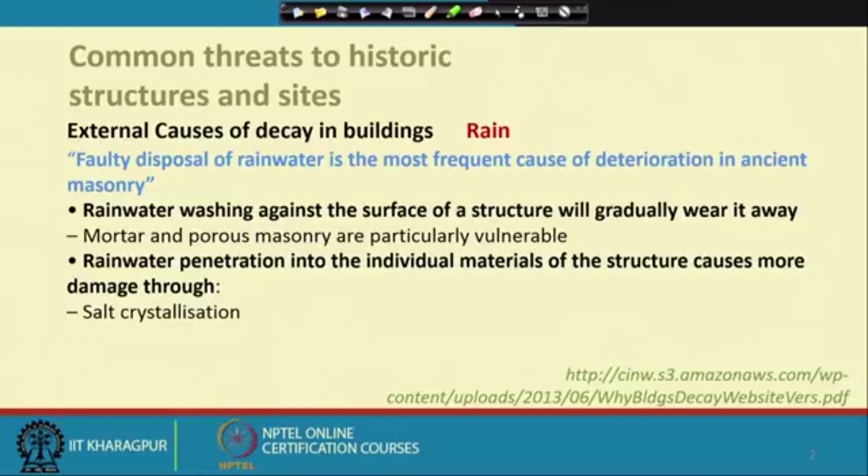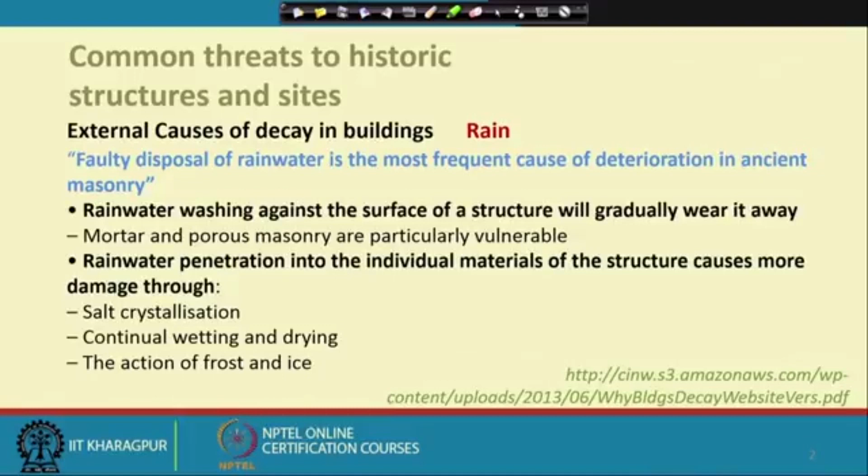We have been discussing the causes of decay of cultural property. In our last lecture we discussed the problems due to gravity, sunlight and other issues, and we started with rain, how it can cause problems in different forms. The faulty disposal of rainwater is the most frequent cause of deterioration, and it can wash against surfaces, especially porous building materials like brick and certain kinds of stone. Rainwater penetration into individual materials of the structure causes more damage. I mentioned salt crystallization, continual wetting and drying, and the action of frost and ice. We will discuss these three independently, as it is not only one factor which causes the problem, there are many things combined which cause some of these basic issues.

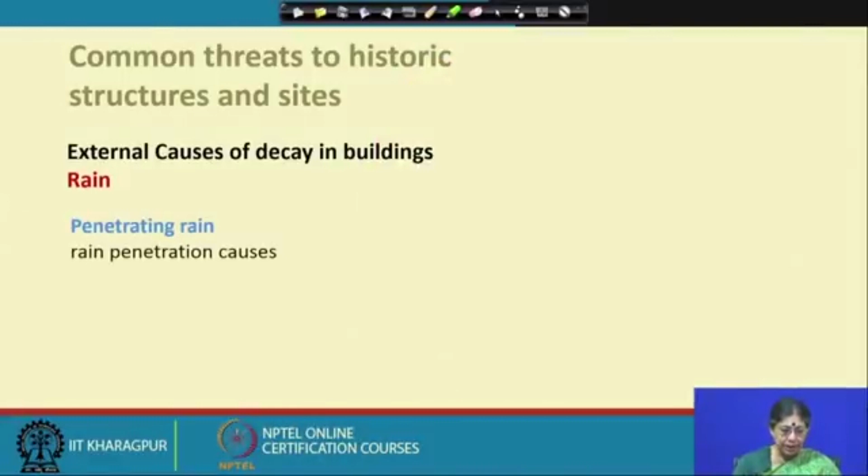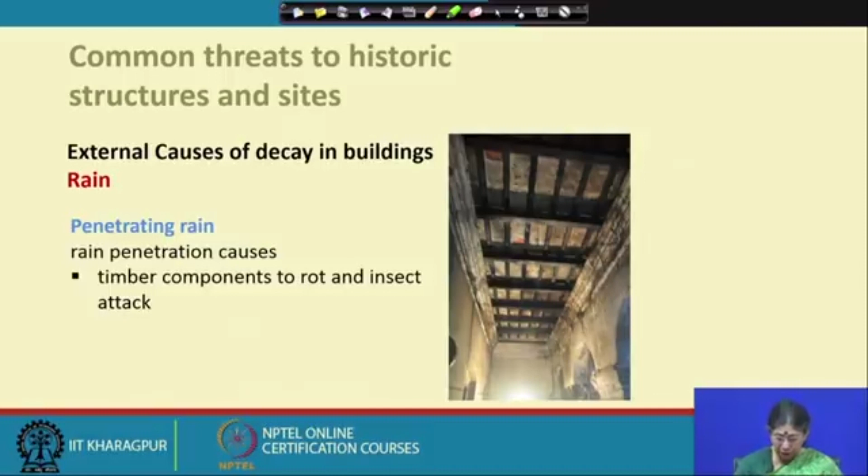Now let us see the external causes of decay, the penetrating rain. Rain penetration causes timber components to rot and attracts insect attack. This is again in Narajol, where you can see roof damage that has happened, flat tiles, and timber posts, beams and rafters. Because of the water penetration through the roof, these timber elements are not only rotting but this also creates a very good environment for different types of insects to attack.

This is also Narajol, one of the roofs, showing what type of damage has been happening. There are timber blinds and other elements with major problems, particularly where the timber beams are resting within the masonry. These places are getting affected due to water penetration and rotting of the timber, which ultimately causes structural problems to the entire structure, and the roof may collapse because of damage to the embedded structural timber. These issues happen one after another as subsequent problems, and if not taken care of initially, it can become very severe.

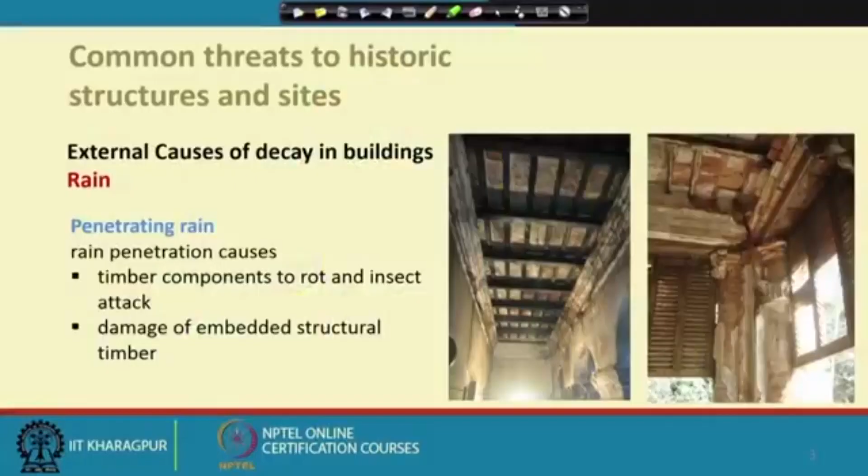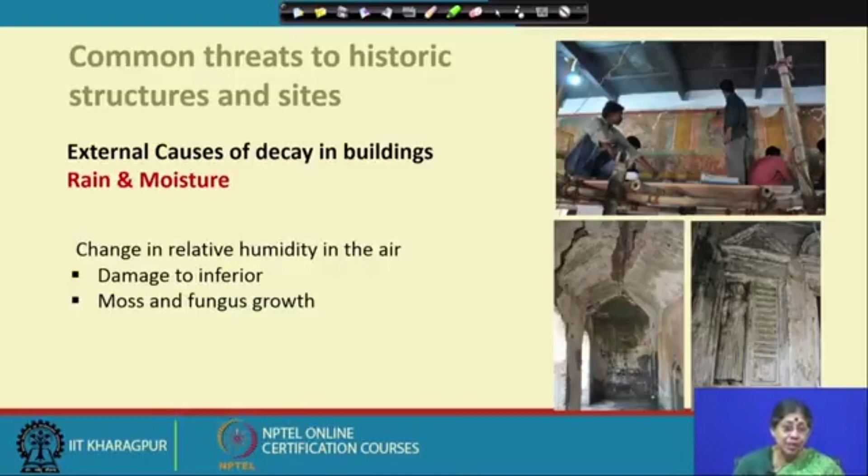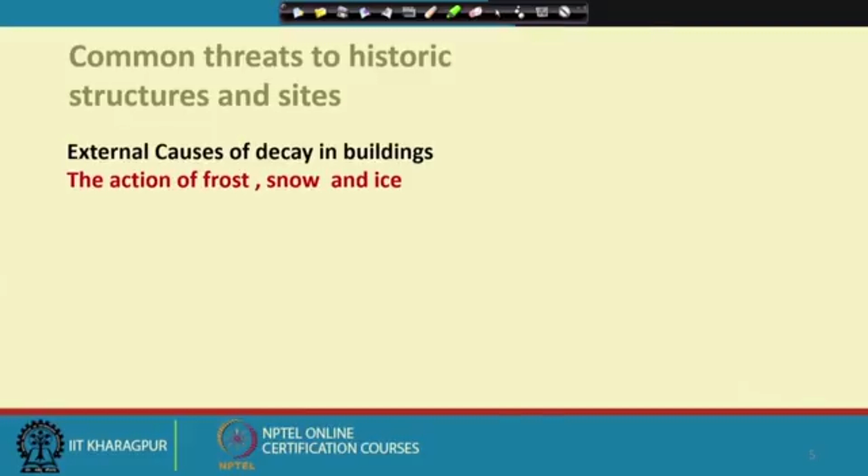This damage happens one by one, all related, and if not taken care of, it also becomes a very good environment for moss and fungus to grow, and there are a variety of moss, fungus and biological causes which find the ideal environment to grow in certain conditions. These are some issues which happen due to rain, accumulating rain, or rise in humidity. The other related problem, especially in cool climates, is the action of frost, snow and ice. Many places this causes severe damage. Even in India, a vast country, there are areas with a very high degree of snow accumulation.

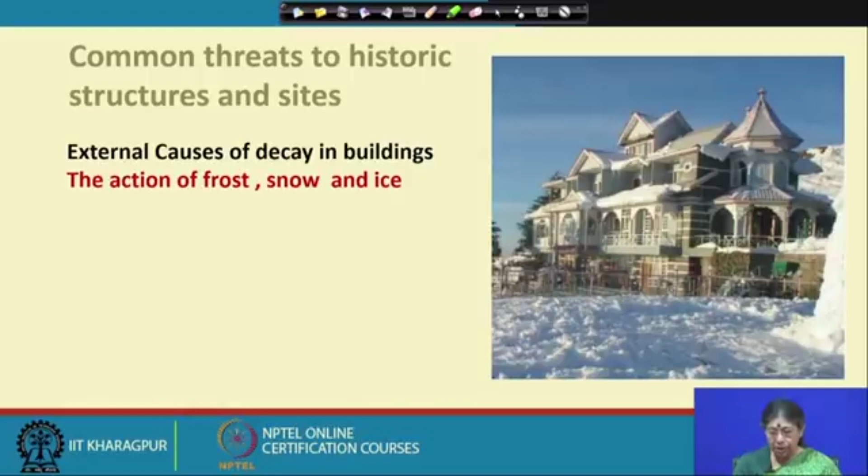This is Shimla, as you can see a lot of snow has accumulated on the sloping roof. If that is not structurally sound, this can cause an extra load and a severe structural problem. It can cause destruction to the masonry itself, and affects the members of the parapet and pinnacles. The heavy sheets of snow can cause the roof structure to collapse under heavy load.

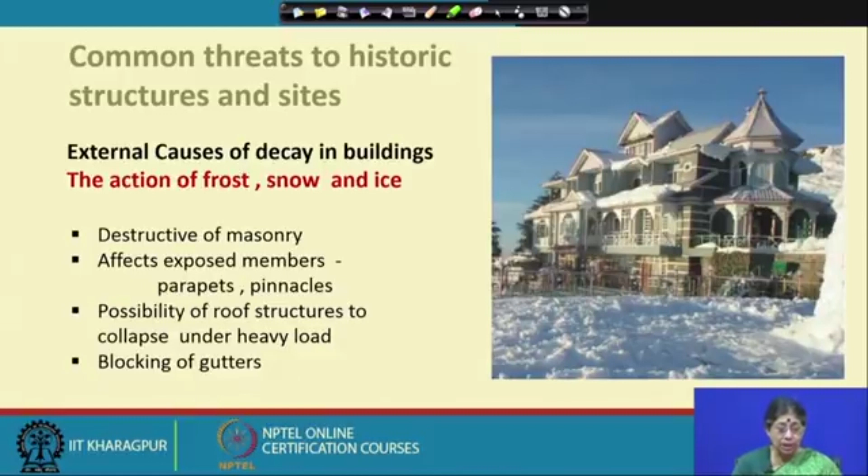In addition to water seepage and other issues like moisture penetration, the flow of water, gutters and pipes can get blocked due to the snow and the drop in temperature. This has to be taken care of. The blocking of gutters is a very severe issue. So depending on the climate, the likelihood of certain events, and the material, one has to understand the likely causes of decay in a particular scenario.

Now also, salt crystallization. Then there is groundwater, which can happen because of accumulation of water or a high groundwater level. If the groundwater contains salt, either the salt comes with the groundwater, or the salt may already be in the building, since some bricks, due to the material, can have a high accumulation of salt. So when salt comes into play, salt crystallization is one of the major issues affecting porous building materials.

You can see in North Bengal that salt crystallization has happened, and you can clearly see the marks left when the salt comes out. Here you can see the spalling of the plaster because of rising dampness along with salt crystallization. Salt crystallization can happen due to a change in groundwater level, due to rising damp by capillary action, and due to crystallization damage from dissolved salts and evaporation of the groundwater.

So what should one do about this? Generally, one approach is to stop groundwater ingress, especially since the porous building material acts as a capillary - the pores in the porous material suck up the water, and along with that, if salt comes in, then in the subsequent dry season when the fabric dries up, the dissolved salts come out and accumulate on the surface.

One measure generally taken is to make a damp proof course, and since a structure is already there, there are ways to insert a damp proof course into a historic structure. But one thing is sure - sometimes the mistake made with this type of salt crystallization is that surfaces are covered with paint or tiles, and that must never be done, because the fabric is actually breathing out, and if that process is stopped, the moisture goes farther up.

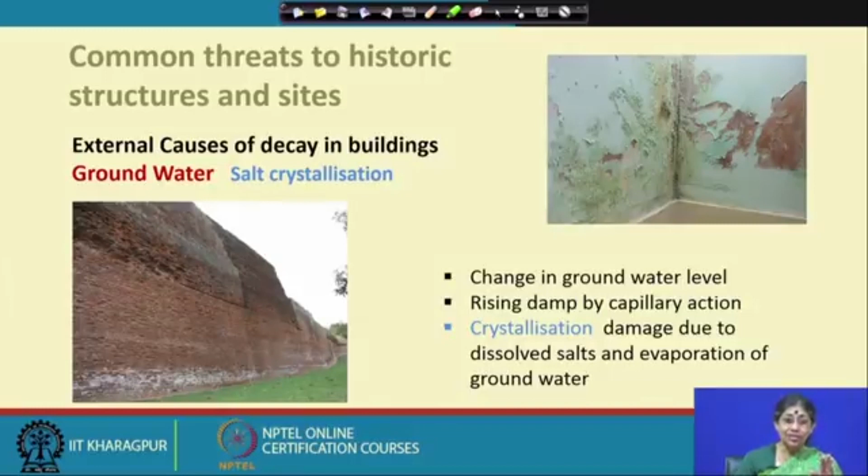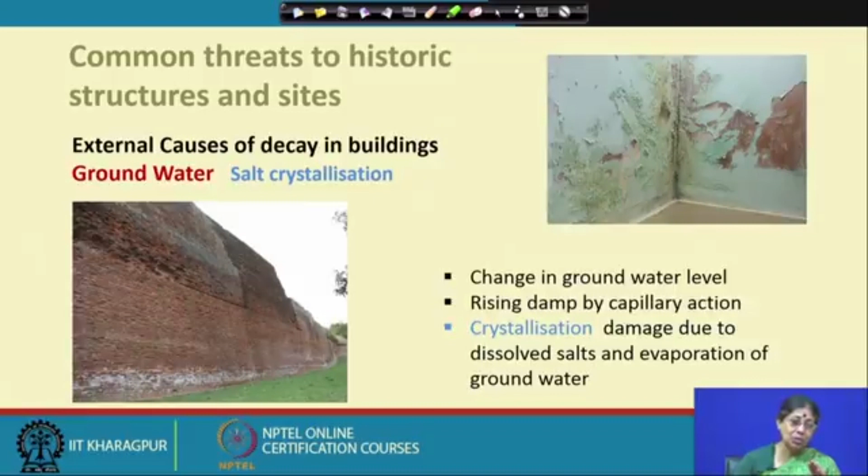So one should not stop the possibility of water within the fabric coming out to the surface. If this is happening a lot very regularly, then inserting a damp proof course and other measures are there, but never cover the surface with paint or material which stops the water within the fabric from coming out. This is absolutely important to remember.

Now let us see what is happening. Let's take an example where there are places with days of heavy rainfall followed by a drying period, so there is a continual cycle of drying and wetting. In a porous material, water tries to fill up the pores, and with the water there can be dissolved salt, either dissolved in the water or already within the material.

Now, as we can see, when the water comes there, it will be followed by a drying period when the water tries to recede away, but these salt particles try to crystallize. With this repeated cycling of the wetting and drying period, we have to see why maintaining the movement of the water through the pores is so important.

For example, let's see what happens in this case: there are pores. Depending on what material it is, there can be small pores, there can be large pores, or a combination of large and small pores. So when there is rain, in the wetting period, the water comes through the pores, and as you know, with capillary action, the smaller the diameter of the pore, the more the water can go in.

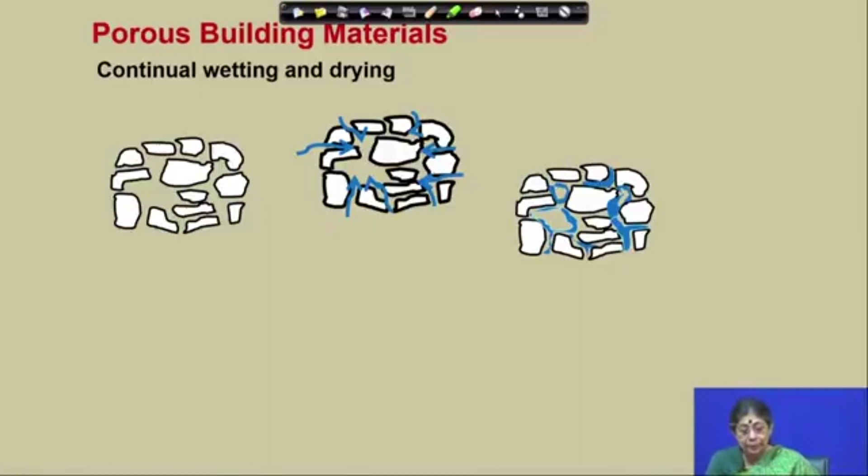In the larger pores, the ingress is much slower. So in the wetting period the water comes and tries to fill up the smaller pores and the larger pores. That is what is happening here. It generally fills up all the pores if the rain continues for a longer time. This is the wetting period, and then it will be followed by a drying period

when for a few days there will not be any rain. So the water is there, and what we see here is the salt which is dissolved, either as part of the material or in the water. These dissolved salts try to crystallize and fill up the pores. In the drying period, the water recedes from the pores, and these crystals remain within the pores. They tend to come out along with the water and get deposited on the surface.

These are those white salt-like things you have seen on the surface of the wall, and that is not so bad. It causes some problem to the fabric, but it can still be washed and cleaned. If it does not remain within the fabric, then it is not much of a problem. That is why allowing the water to come out is absolutely important.

Now, in a case where these crystals become so big that they block the narrow pores and do not allow the water accumulated inside to come out, it causes a pressure to the internal material, a thrust happens, and that causes cracking of the building, if the crystals are not allowed to come out.

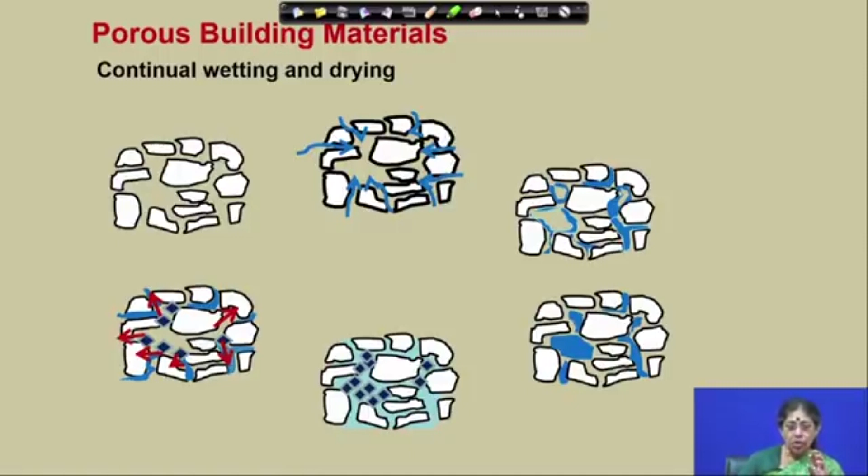Now, the salt dissolved in the water, or a salt content in the porous building material, if combined with wind, can cause some other severe problems. We will see that, but we are now coming to the next natural cause, which is the wind.

I'll come to the water and moisture problem later on, but wind as such can exert a strong directional force. The exposed sides of the building can therefore be subjected to a pushing action, while the protected lee side can experience suction. So there is a difference between the protected leeward side and the windward side, and these can behave differently.

Same like the sun, a side which is more exposed to the sun and which is very heating up and cooling down very drastically will have a different type of problem, whereas the other side of the building, or the fabric which is cooling down very slowly, that probably will not happen. So, one has to also understand this phenomena.

So, this is one that wind creates a problem, and especially the tower spires and the bell towers, which also can move in the high winds. This is a very good example, the Norwich Cathedral. You can see that in England there is a 99 meter spire which has been found to move to and fro almost 3 inches or 75 millimeter in a high wind. It was actually moving. And it is a very important case, because at one time the movement and the deterioration of the spire stone was such that the authority decided to tear down the spire.

And it is Sir Bernard Feilden, whom I have been referring to a lot. He was appointed as the architect of that conservation project. There is a lot of writing, and he has also spoken on various occasions that when he went up he could feel the spire moving, but rather than tearing it down, he talked to the structural engineers and others, and he decided to put a stainless steel wire, and also in addition consolidation and some replacement of the damaged stones, and because of that the original spire is still there. It is moving, but just the moving is not bad.

So, one has to understand even high structures or high rise parts or elements or components of a structure can cause a problem, and it is not always necessary to demolish them, but there are ways to find. So, this is a very important case where the problem of the spire actually happened due to the wind load.

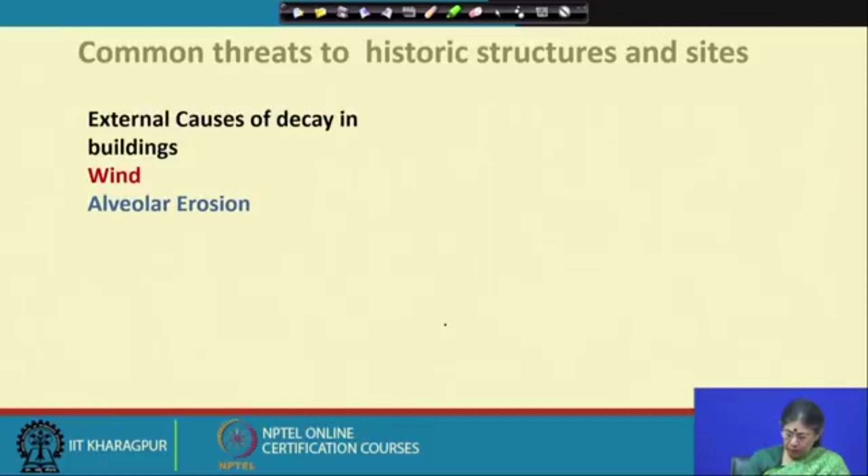Now, let us see what really is the alveolar erosion. Let us say it is a porous building material. So, let us say these are the bricks, and I am also exaggerating this part. Between the bricks there are these joints, and apart from that, within the brick also there will be fine capillaries through which the water is likely to come out. Now, if there is a salt within the water, the salt will come out, and if it comes out on the surface, then, I am of course emphasizing a lot, it is out of scale, but it will deposit and it can be washed away.

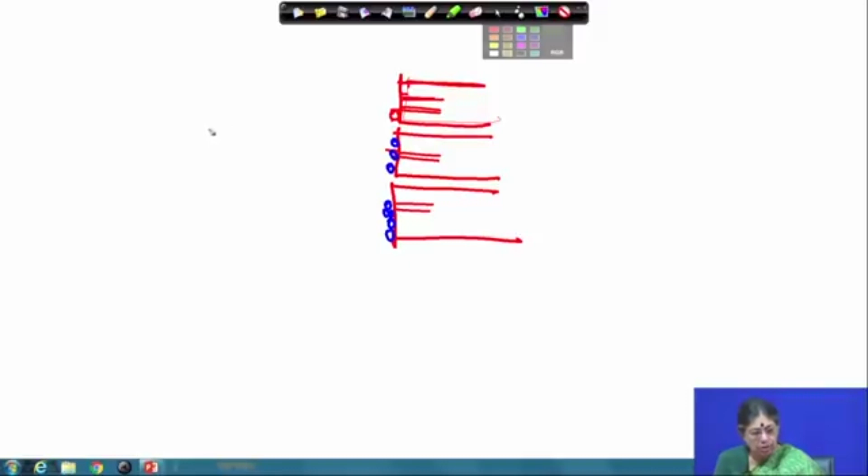But when there is a very high wind coming and hitting the surface, which happens in Mahabalipuram, then before this salt can come out of the surface, while it remains within the surface, it gets dried up, the water is sucked out, because such a high speed of wind is happening. And so these crystals, rather than coming out, the water cannot come out, and it is getting dried up very quickly. So, the crystals actually remain within the material, within the pores or within the joints of the material.

So, what happens is that at a certain time these surfaces become separated, and they fall off. It is not actually in scale. If you see the pock mark, this happens. So, this actually falls off, and a local hole happens.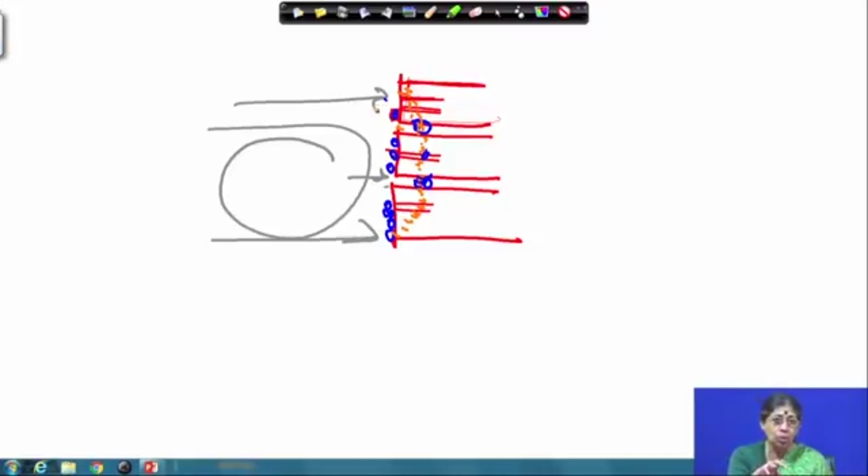And when this local hole happens, there is a local eddy current which forms, which is much faster. And when this local eddy current forms, it again does not allow the further water to come out, and they will deposit further inside of the surfaces. So in that case the next layer of this surface will get damaged, and this progresses,

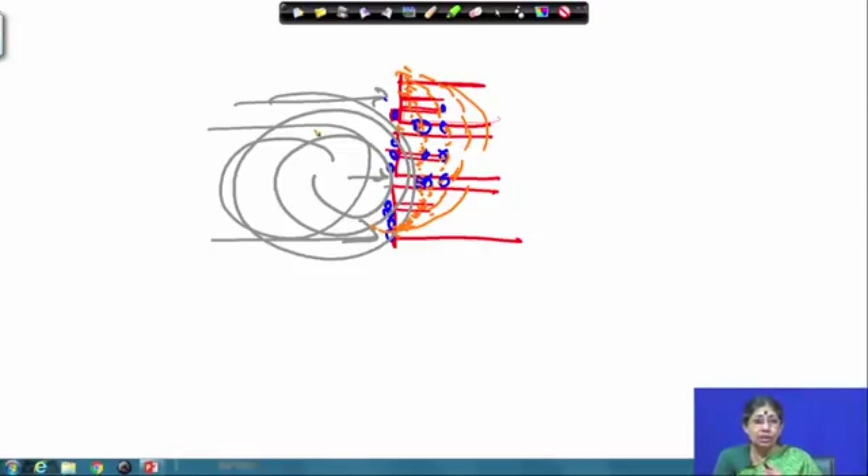and then we will see that because of that local eddy current and a very high speed, gradually holes develop in the surfaces. So, this is called alveolar erosion. Alveolation means holes, and erosion. This is quite dangerous, because as you have seen, these types of holes and pockmarks over the whole surface happen because the salt remains within the fabric. So, this is a problem.

And now, the question is how you take care of that. The idea is that you have to see that the speed of the wind becomes less. So, you have to give a curtain. What is that curtain? In case of Mahabalipuram and many other cases, a barrier is formed. In this case, casuarina trees are planted, so that the speed of the wind which is coming gets reduced. And along with that, the insertion of damp proof courses, reducing the salt, draining away the salt from the structure, all these are very important.

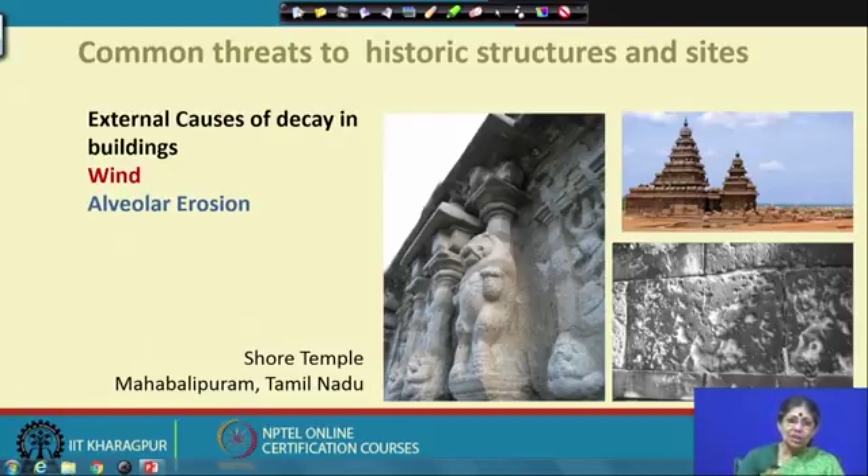So, this is what I said, the salt crystallization damage and the alveolar erosion. As I say, the alveolar erosion is much more dangerous. It affects the material much more, and this can't be rectified unless you change the stones. And the next one is the biological and the botanical causes.

As we have seen in some cases, in a very high rainfall area, different things are important. So, in the biological and botanical causes, which is our next aspect: different types of animals and the problems associated with them. These also cause a lot of problems. The birds, the bats in historical structures, and of course, we can't stop them. We have to see how to reduce the damage, because there are also societies which are very concerned about animal protection. So, we have to find a balance. And we will see what type of damage happens.

The insects, different types of insects, depending on a particular weather condition or a particular type of material, are also problem areas. The trees and the plants, if not taken care of at a very initial stage, can be very disastrous for a historical structure. The fungi, different types of fungi and different types of mold. There are thousands of species of molds and lichens, each has its own habitat and environment which they like, their different food habits, and they survive on different types of built environment.

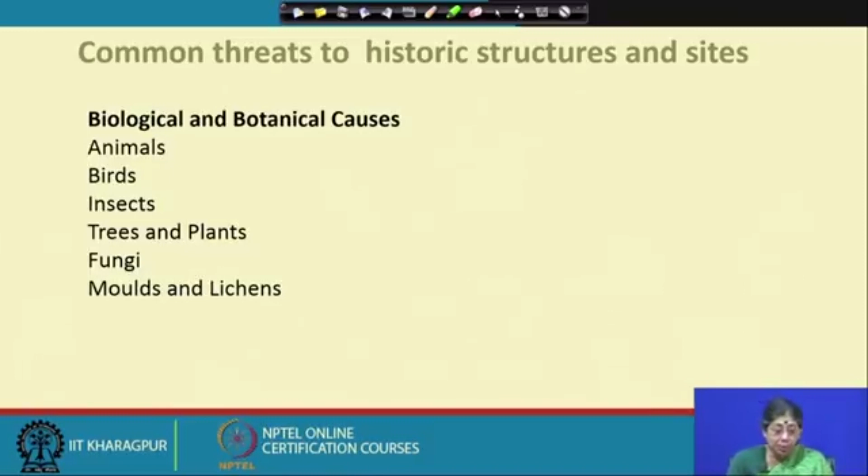So, that is why we need people who specialize, who know the behavior of different types of molds and lichens, and unless we have a clear understanding of that, we can't really investigate or take precautionary measures. There are so many species of algae and moss, and it is very important to understand the reasons for their decay and other things.

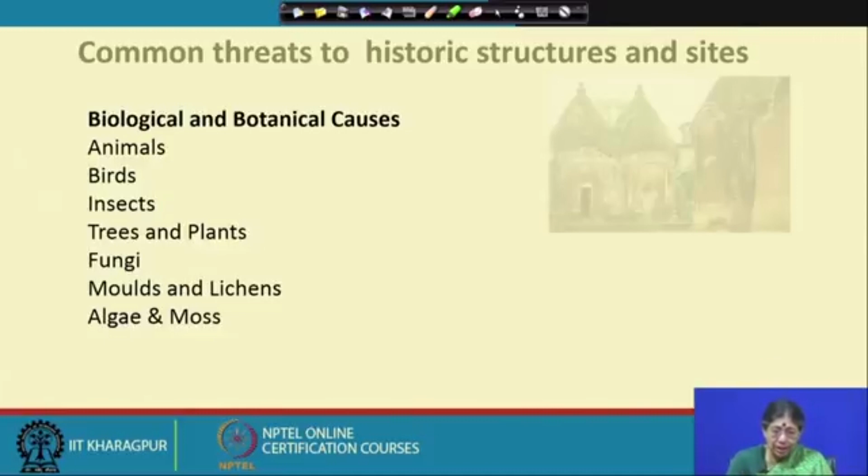And as you can see, this is Maluti, the terracotta temples in Jharkhand, on the border of West Bengal and Jharkhand. More than 100 terracotta temples are there, and you can see what type of damage has happened due to these biological aspects of the moss and fungus. And as I said, it depends on the material, and also the variation of the fungus, algae and moss and their habitat. So, it is very important to take expert advice for that.

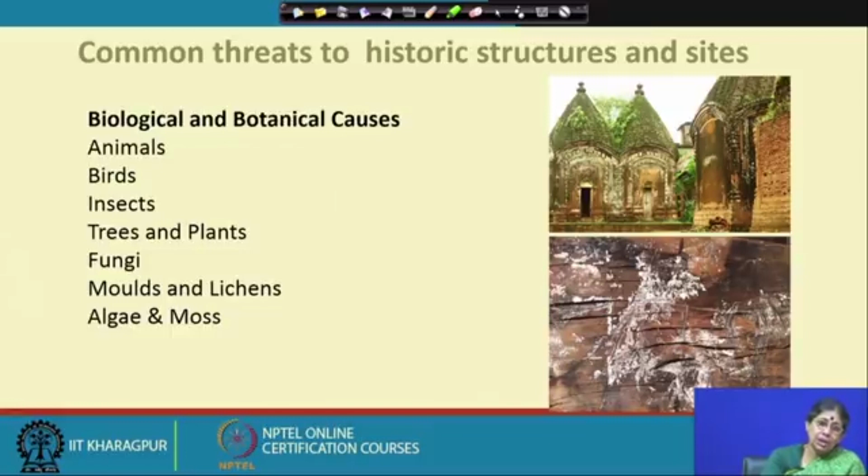Again, while cleaning, one has to be very careful, because it should not affect the material in a negative way when cleaned. So, this is a holistic approach one should take. We will take those aspects into our next lecture, where we will talk in detail about the various biological and botanical causes, and broadly what type of damage and decay they cause to our historical structures.